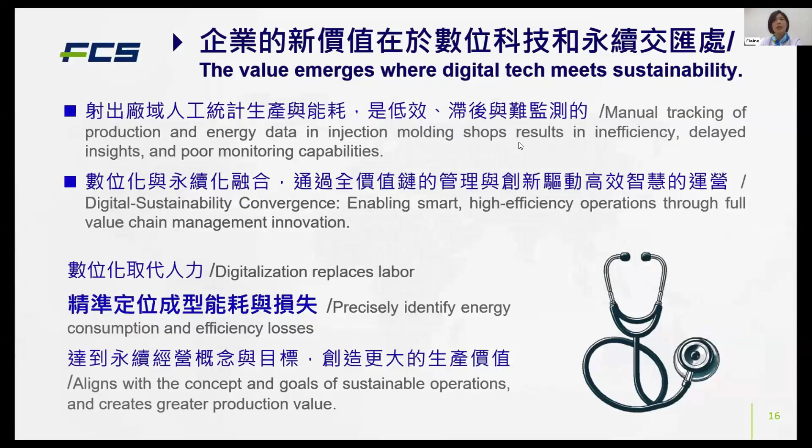Digitalization plays a key role in improving efficiency for injection molding factories. While it is aligned with sustainability goals, it gives much clearer visibility to energy use, efficiency losses, and production waste. This transparency allows teams to react fast and make better informed decisions. By pinpointing exactly where energy is consumed and where efficiency is lost, digitalization supports continuous improvements in operational sustainability and ultimately creates greater production value.

In an injection molding factory, the real business value of data comes not from collecting it, but from analyzing it and applying it to daily operations. When we understand the data behind our process, we can transform what used to be waste into real value. The value of an injection molding shop ultimately depends on machine uptime and operational efficiency. Every hour of downtime, every reduction in cycle speed, every quality defect, all of this translates into hidden costs. And these losses usually come from these major areas: human resources, energy, and materials.

Some issues are easy to notice, like machine breakdowns or scrap parts. But many losses remain hidden below the surface, such as microstops, material waste, setup delays, or small efficiency drops that add up over time. With the right digital tools, we can make these invisible losses visible and turn them into opportunities for improvement and increased productivity.

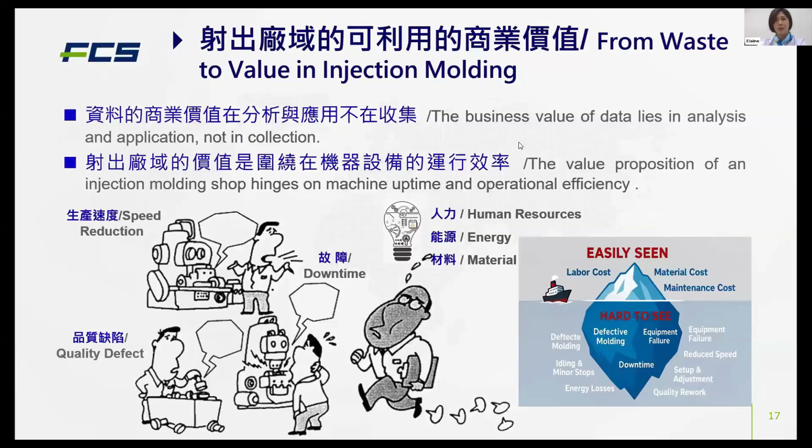As we move toward digitalization, manufacturers quickly discover that the challenge is not buying sensors or installing software. The real challenge is making digital tools work in actual production. In injection molding, digitalization typically encounters four major bottlenecks.

First, measurements and monitoring: what should we measure and how should we measure it? Many factories are unsure which parameters are truly important or what instruments are required to capture them accurately. Second, data collection: what data should be recorded and how should it be collected? A lot of production data exists, but it may not be structured, consistent, or ready for analysis.

Third, analytical modeling: how do we build models and which methods should we use? Turning raw data into meaningful insight requires engineering knowledge, process understanding, and proper machine learning methods. Fourth, intelligent decision making: how do we apply the result to real production? This includes adaptive machine control, early warning, and data-driven decision support for continuous improvements.

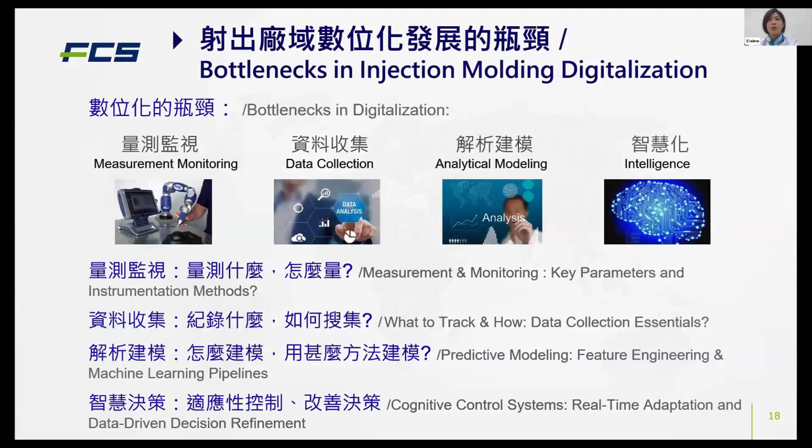These four bottlenecks explain why many digital projects start with strong motivation but struggle to achieve real, sustainable results on the shop floor. When we talk about digitalization, it's easy to focus on dashboards, sensors, and systems. But digital tools are only meaningful when they help us solve production bottlenecks on the shop floor.

Digital transformation usually progresses in stages, from short-term visibility to long-term adaptability. Short-term: IoT and visualization. In the beginning, the goal is simply to connect machines and collect real-time data. Visualization helps us answer basic questions like what occurred. This creates the foundation for a smart factory.

Midterm: transparency. Once data becomes transparent, we can ask deeper questions: what is happening right now and why? This stage brings clearer visibility on-site analysis and a clear understanding of process behavior.

Long-term: predictive and adaptive. With enough data and proper analytics, factories can predict what will happen next and eventually reach adaptive manufacturing: how should we adjust automatically? This is where sensing technology, scientific molding data, and AI-based methods come together to support decision-making and continuous improvements. So remember, digital systems are tools. The real goal is to solve production problems and increase stability, not just to collect data.

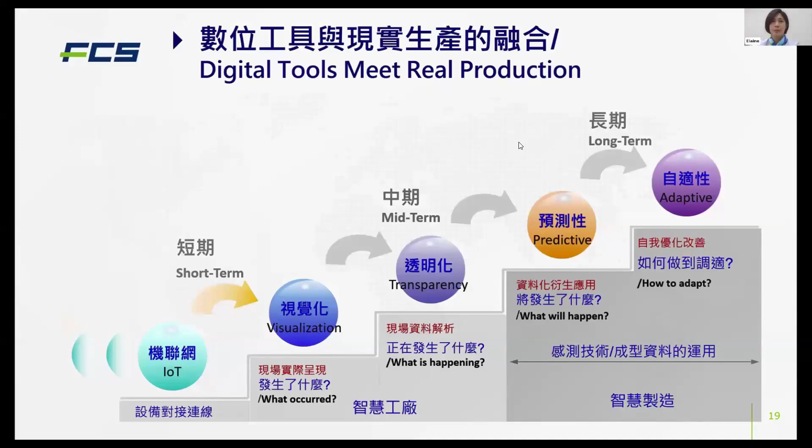After understanding the bottlenecks in digitalization, the next question is, where should injection molding factories focus their digital transformation efforts? Today, the development of smart injection molding mainly revolves around two key themes.

The first theme is smart factory. By connecting machines, sensors, and production systems, factories can achieve real-time visibility, automated data flow, and more scalable production. Human-machine collaboration also helps improve productivity and reduce unnecessary labor workload.

The second theme is smart manufacturing. This goes deeper into the molding process itself, integrating information technology with manufacturing technology to enable self-sensing, autonomous decision-making, and closed-loop control. In other words, the process can detect more anomalies, adjust parameters, and maintain stability automatically.

When smart factory and smart manufacturing come together, they create the foundation for AI-driven production, enabling factories to continuously improve quality, efficiency, and sustainability.

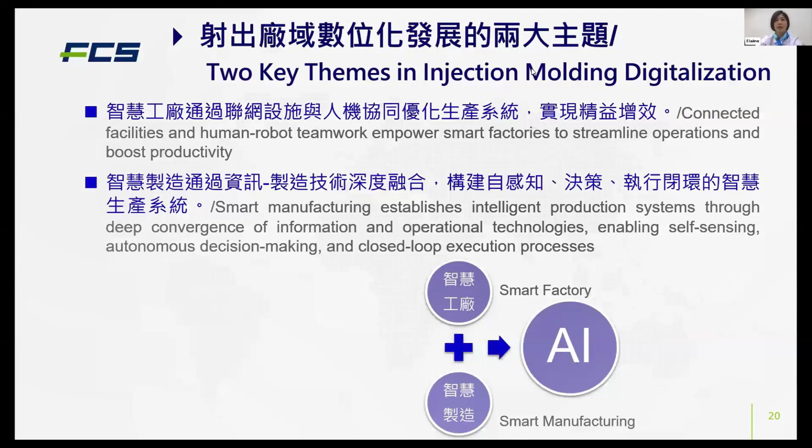Now let's look at one of the most important indicators in manufacturing, overall equipment effectiveness. OEE acts like a health check for machine performance. The purpose of OEE is not to chase a high score. Instead, it provides an objective way to measure where efficiency is lost, so we can reduce waste and improve productivity.

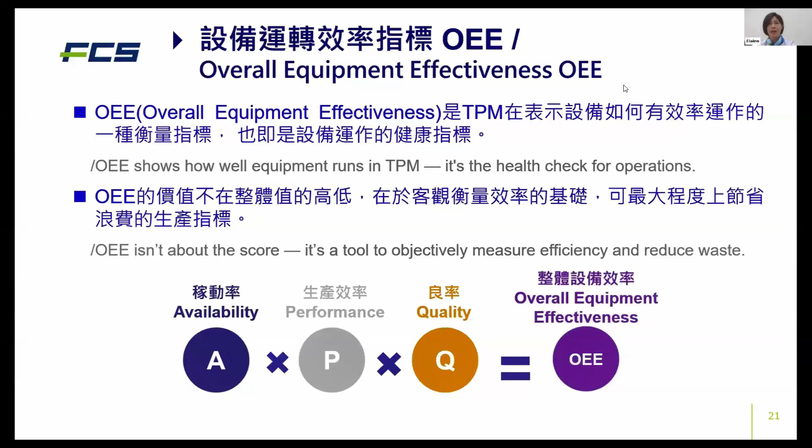OEE is made up of these components. Availability (A): how much time the machine is actually running compared to planned time. Performance (P): whether the machine is running at expected speed or cycle time. Quality (Q): how many parts produced are good parts without defects. When you multiply A times P times Q, you get the overall equipment effectiveness, a clear, simple indicator that helps factories identify losses and prioritize improvement actions.

The real purpose of OEE is not to monitor data or report numbers. It is to help us identify the true root causes of losses and verify whether our improvement actions are effective. OEE allows us to track equipment performance and compare it with similar machines as a benchmark. This helps us understand where efficiency is lost.

For example, a factory may have availability at 85%, but they are not sure whether the loss comes from breakdowns or changeovers. Performance is 90%, but they don't know if it is caused by long cycles or frequent micro-stops. Quality is 99%, but scrap may still hide issues such as material variation or process instability.

Without understanding the underlying causes, improvement is impossible. OEE gives us the clarity to ask the right questions: What is the real cause, and what corrective actions should we take?

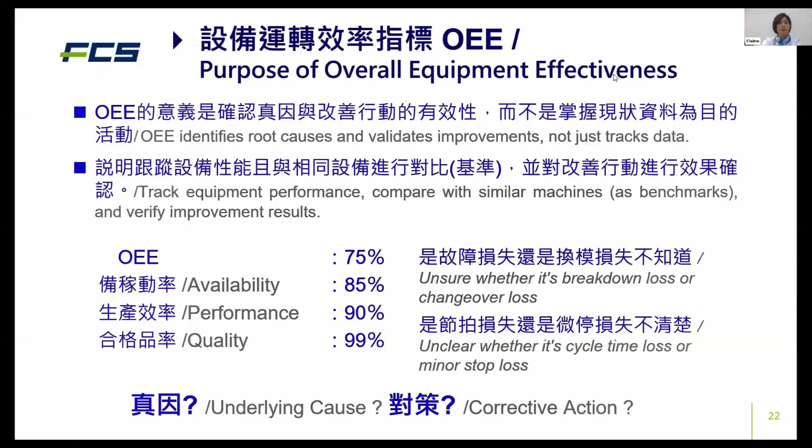After understanding OEE and the importance of identifying losses, we now look at the two key time-based factors in injection molding: cycle time and changeover time.

Cycle time is the time from one good molded part A to the next good part A. It reflects the stability and efficiency of the molding process. Changeover time is the time from the last good part A to the first good part B. When switching models and products, this period often has losses such as trial shots, adjustments, warm-up cycles, and unstable conditions.

Both CT and CO always exist, but the question is, do we have a clear standard? And how do we verify that standard is actually followed?

When CT becomes abnormal, it usually indicates issues such as slower cooling, inconsistent injection speed, or microstops. When CO becomes too long, it often reflects problems in mold conditions, setup preparations, or unstable first shot quality. So the important questions for the factory are: what is the root cause, and what countermeasures should we take?

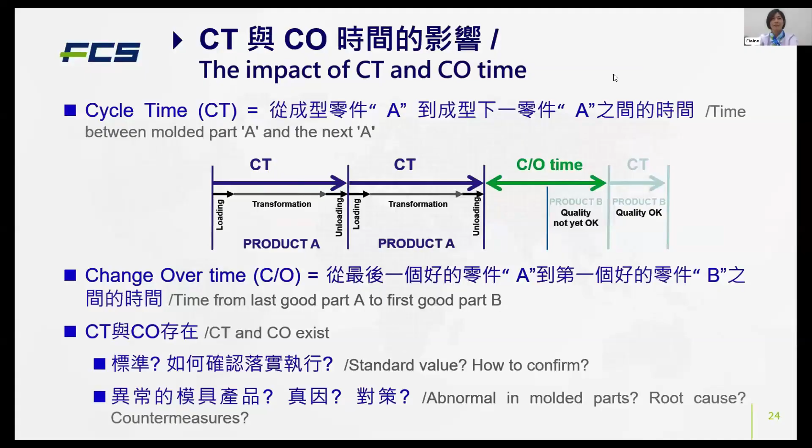Both are 200-ton clamp force. Both have a 140-bar hydraulic pump, a general-purpose screw, a 225mm linear shot capability, and the same tie bar spacing.

On paper, these two machines look identical, but in real production, their molding behavior can be very different. Factors such as screw diameter, injection rates, actual response speed, pressure build-up characteristics, and even wear conditions can cause significant differences in filling, packing, cooling, and final part quality.

This is why specification level consistency does not guarantee process level consistency, and it's also why scientific molding and digital monitoring are so important. They help us reveal differences that cannot be seen from machine specs alone.

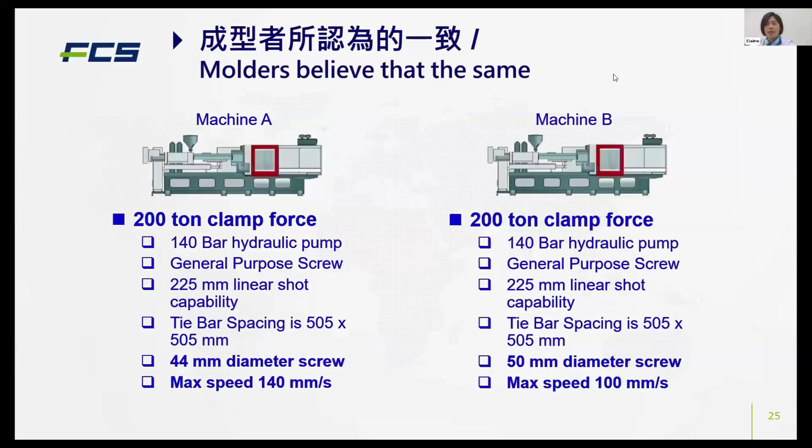Even when two machines have the same clamp force and similar specifications, their actual injection behavior can be very different. One of the biggest differences comes from the screw diameter. In this example, machine A uses a 44mm screw, while machine B uses a 50mm screw.

Both machines are set to the same 50% injection speed, but the actual linear injection speed is completely different. The 44mm screw produces a higher melt flow speed, about 140mm per second, while the 50mm screw produces a slower melt flow speed, about 100mm per second. These differences in melt flow speed lead to different flow viscosity, different filling behavior, and ultimately different part quality.

This is why using the same percentage setting does not guarantee the same molding results. To achieve consistency between machines, we must compare real injection viscosity, not just the percentage shown on the screen.

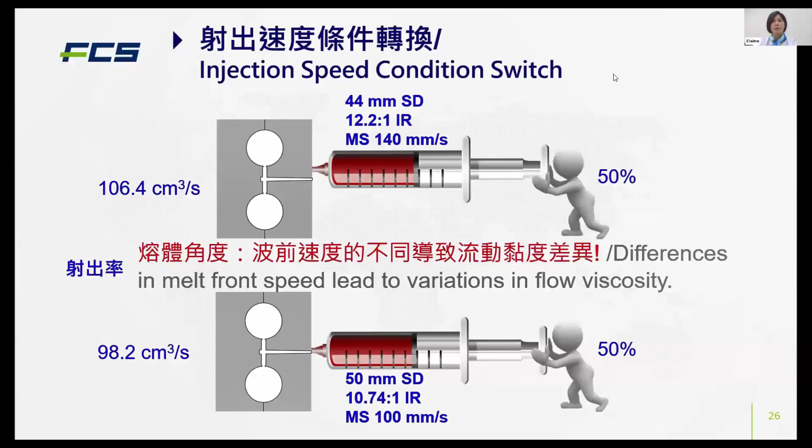If two machines are running at different actual velocities, even if the setting looks the same, the melt inside the mold behaves very differently, giving different filling patterns, pressure build up, and packing results.

This is why achieving consistent molding requires more than machine parameter percentages. We must look at the actual melt behavior, which is driven by data such as viscosity curves and flow characteristics. Even parameter settings, whether it's speed, pressure, or switchover points, must be based on data-driven rationale, not guesswork or habits. This forms the foundation of scientific molding, ensuring repeatable and stable production from machine to machine.

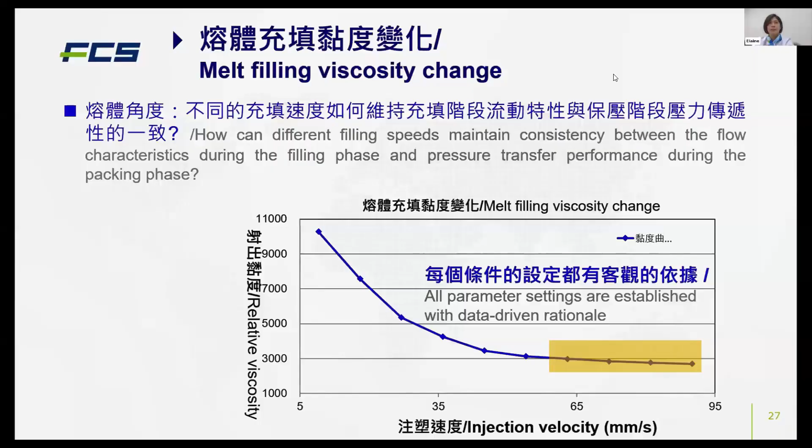Now, let's see how injection speed affects melt viscosity and flow behavior. The next question is: is injection speed the only factor that affects consistency between machines? The answer is not at all.

In this example, machine A and machine B are still using different screws and therefore producing different melt flow speeds, even at the same 50% setting. But speed is only one piece of the puzzle.

Other factors also affect filling behavior and molding consistency, such as the screw design, the injection rate capability, the machine response time, the compressibility of the melts, and even the hydraulic or electric system characteristics.

So even if the setting on the controller looks the same, the actual melt movement inside the mold can be very different. This is why relying on percentage-based settings is not enough. To truly achieve machine-to-machine consistency, we must understand the real physical behavior, not just the parameter on the screen.

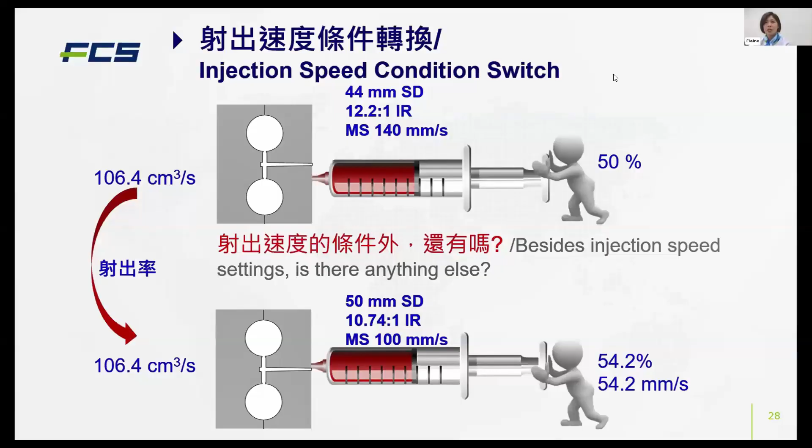In many factories, the cooling system is often the weakest link. Poor channel design, scaling blockage, or undersized pumps frequently cause unstable water flow, which leads to inconsistent mold temperatures and unstable cycle times. When we review molding conditions, we usually see mold temperature recorded, but very few factories record actual mold water flow rates. This means we may think the temperature is controlled, but the cooling efficiency is actually fluctuating.

To ensure stable molding, we must confirm: is the cooling system delivering enough flow, and is the flow turbulent and not laminar? Improving cooling flow is one of the most cost-effective ways to reduce defects and shorten cycle time.

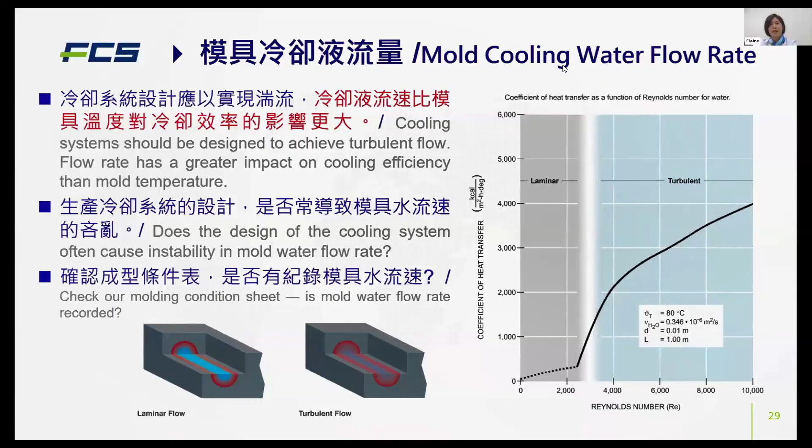Up to now, we have focused on the machine and process level, how speed, viscosity, and cooling affect stability and cycle time. In this part, I'd like to zoom out to the factory level and show how we connect all of this through industrial IoT.

FCS provides an industrial IoT platform based on our MES system. It connects injection machines, equipment, and even logistics devices into one integrated solution. Around this platform, we offer several key application systems.

MES, Manufacturing Execution System, manages production orders, machine status, molding parameters, and traceability on the shop floor.

WMS, Warehouse Management System, handles material in, out, inventory locations, and supports real-time stock control.

EMS, Equipment Management System, monitors machine health, maintenance plans, alerts, and OEE analysis.